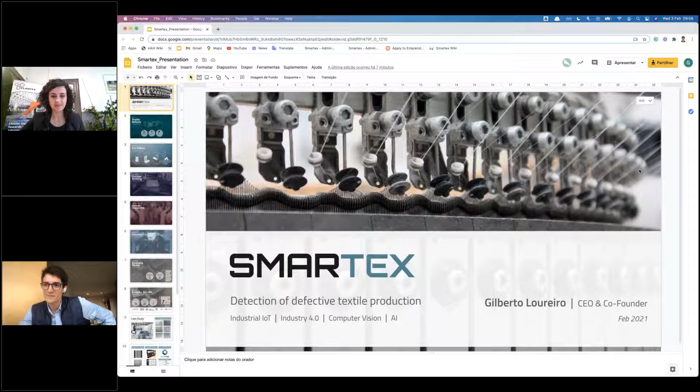Thank you for the kind introduction, Luisa. I hope you all can hear me well and see my screen properly. So again, as Luisa presented, my name is Gilberto, I'm a Portuguese entrepreneur currently living in Porto, Portugal, but I've been living in San Francisco and Shenzhen over the past years to develop this amazing technology that we propose to improve textile industry automation and also to dramatically reduce textile industry defective waste, which is a hell of a problem. I will show you details later on.

As many of you probably know, the textile industry has, at each stage of its processes, defects and waste due to inefficiencies, because we work with raw materials that are not perfectly controlled, natural fibers, and because production speeds are higher and higher. So it's normal and acceptable for every textile factory to have 1%, 3%, sometimes 5% textile waste - that's how the industry has worked for centuries. However, there has to be a better way to produce textiles without so much waste. 3% looks like a small number, but considering production volumes and the gross margins of a typical textile factory in knitting or weaving stages, 3% can represent a big slice of the company's profit. This reduces gross margins significantly, damages the environment, and because textile prices build up from yarn to fabrics, all processes have multipliers in the pricing.

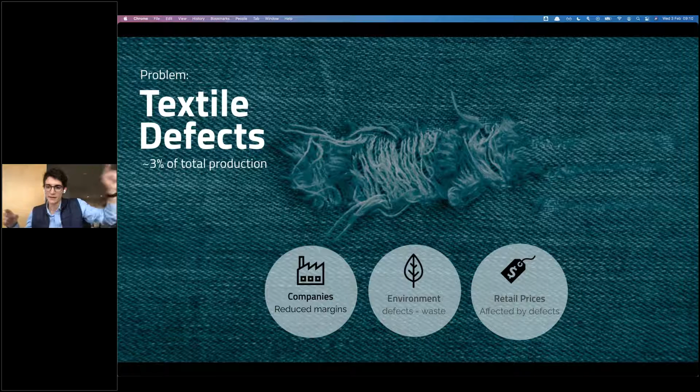This waste propagates until the end of the chain, so it affects directly the retail prices as well. The textile industry is one of the largest in verticality among industries. Sometimes the yarn is spun in India, but the knitting is done in South Europe, and then the dyeing could be done in North Europe, and then the garment is done in cheap labor countries typically. So this is the way the industry is spread all over the place.

Sometimes these folks don't talk with each other when they ship raw material from one side to the other, and the communication is based many times on trust, based many times on human inspection. They need to have several human inspections in each of these stages just to make sure that the knitting manufacturer is exporting quality goods and the dyeing house is importing quality goods. So they have two inspections that add costs, add more prices to the material, but don't add any value.

So that's one of the things that we at Smartex, and as well with Tintex right now, we are trying to collapse all of these miscommunications and digitize the way that these folks talk with each other with digital tools, right?

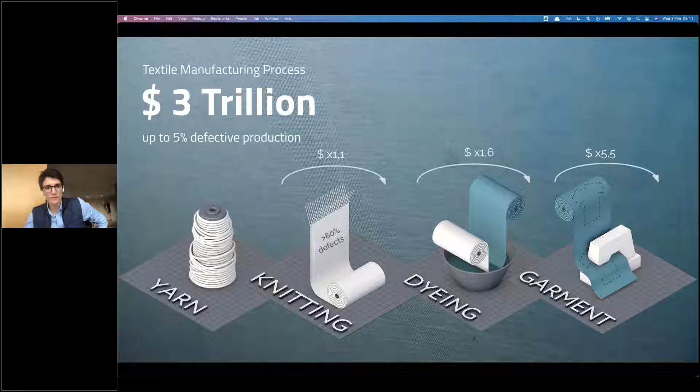So for those who don't know, this is a circular knitting machine. I usually present these types of slides for venture capitalists in Silicon Valley. When they look at this slide, they think this is a time travel machine. But this is actually the fastest way to produce fabrics that the industry knows. I've worked with these machines for more than 10 years. It's a beautiful engineering machine.

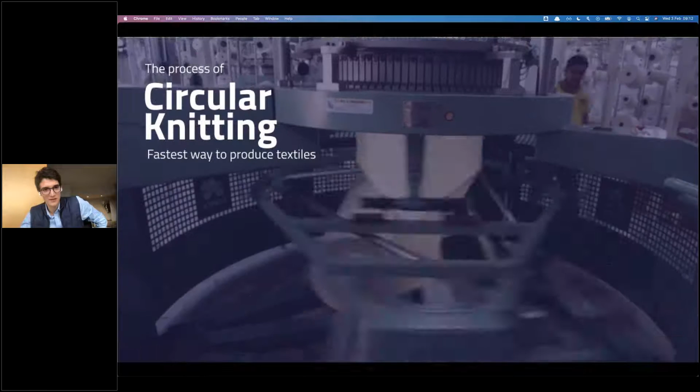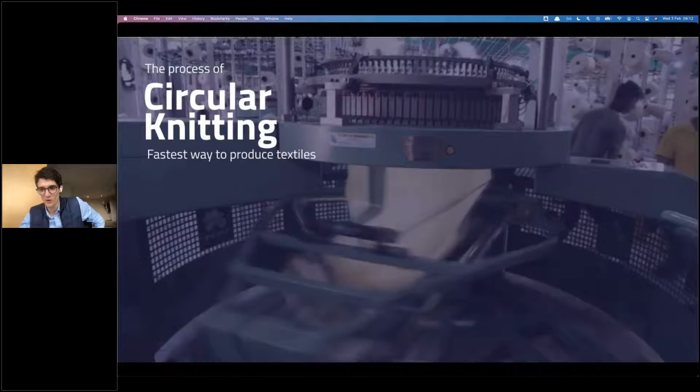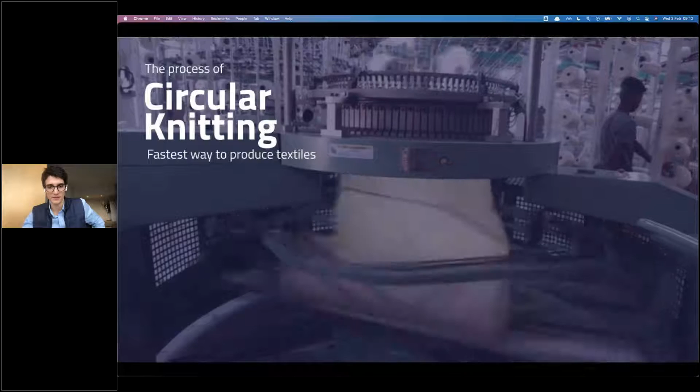As you see, there is a textile roll being produced down there. And as you can imagine, it's not easy to have a person inspecting this textile roll in real time. You cannot have a person inside that crazy machine to inspect it in real time. So we actually need the roll to be ready and then cut it out and inspect it later on. But meanwhile, the roll could already be full of defects and it will become garbage sooner or later, but you never know until you've inspected it, okay?

And if you are lucky, we will inspect it with human inspection people right after the knitting stage. But many times this inspection doesn't have 100% guarantee or 100% coverage, so they do it by sampling. And many times these defects and faults go to the dyeing stage and then go to the garment stage, and eventually we have a Nike t-shirt for $50 costs that could be avoided, and it's garbage, but could be avoided if you detected that defect in the knitting stage, where the fabrics cost like €3 per kilo.

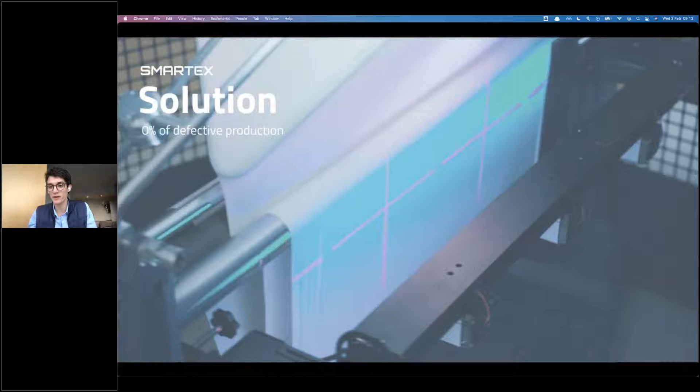So in a nutshell, this is the Smartex solution. This is what we have been working on for several years since college. It's basically, in a simple way, a bar with cameras that you can plug and play inside circular knitting machines, weaving machines, whatever machines that produce on a roll-to-roll basis. So we can take photographs of everything that is being produced in real time, store those images to the cloud.

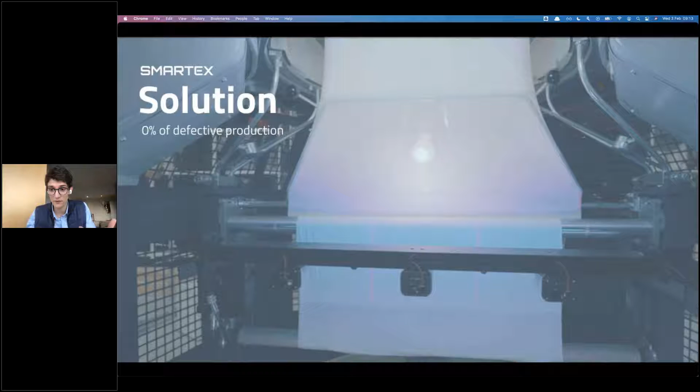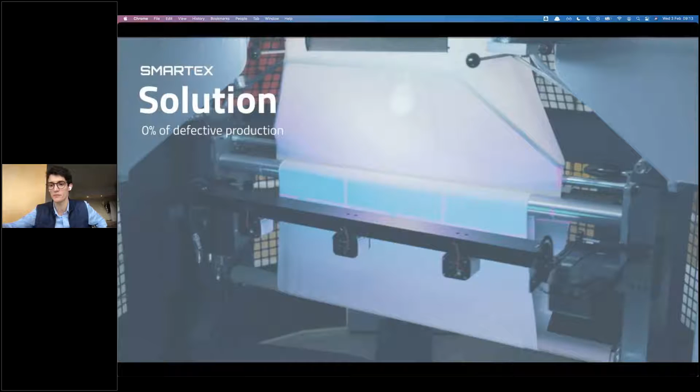We can do a lot of beautiful things with these images. We can use machine learning algorithms to inspect the fabrics in real time, so we can detect tiny defects like lycra lines or thick yarns or thin yarns here and there, tiny holes, and we can intervene in the machine immediately if the client wants. We can stop the machine, for example, or alert the employees in real time. And we also can do other services in the online platform that we provide, which I will explain later on.

In terms of the business model, this is another consequence of such technologies that depend on cloud and software services. We have, of course, an installation fee, but inevitably we also have a monthly or yearly license for all the software that runs and supports such technology. The idea here is to make sure and guarantee that the price of the yearly license needs to be 5 to 10 times lower than the current costs with current solutions of having people inspecting textiles or the waste from defective production, etc.

So just to let you know, the company exists since 2018. However, last year we were able to raise a priced seed round in the US with some of the best in the business, like Spider Capital, SOSV, and Data Collective VC, some of the largest venture capitalists in the world, as well as with the kind participation of Fashion for Good, which is a fund supported by amazing fashion brands like Adidas, PVH, and Kering, etc., that support us with lots of pilots, especially in luxury parts of the industry. We also were very fortunate to have access to the EIC SME instrument of $2.2 million US dollars in the same year.

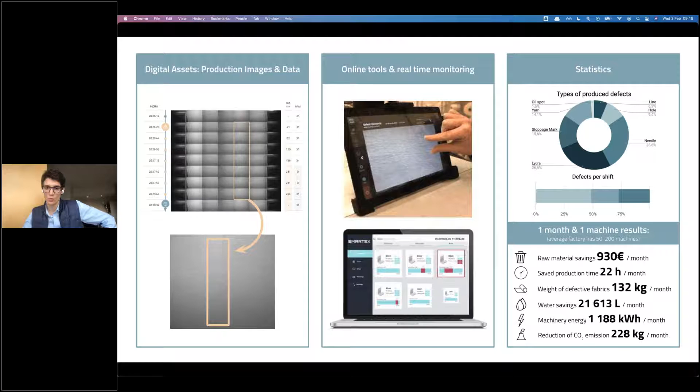So when the Smartex device stops the machine from a periodic defect, we calculate the savings in the amount of fabric we didn't waste because of that. And if we continue to calculate the savings in the dyeing house — because that fabric won't be dyed, won't use water, energy, or chemicals — we find that the Smartex device saves around €1,000 per month per machine.

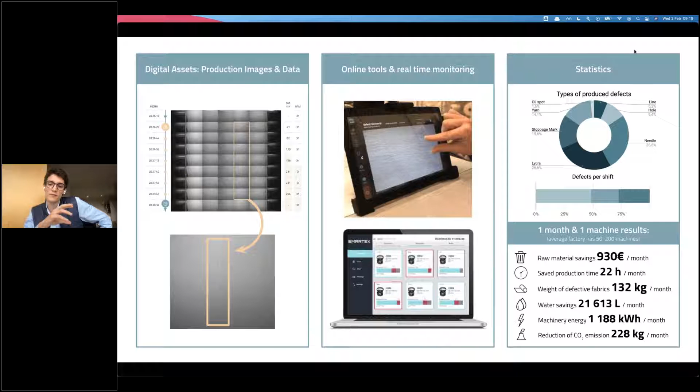This number is being confirmed over and over with our current clients in Italy, Turkey, and many other clients in the north of Portugal as well. So the impact is really amazing in terms of financial impact, but also from a sustainability point of view — the amount of water we don't need to use, the kilograms of fabric we don't need to waste, the production time we avoid spending on waste fabrics. This is very impactful.

And it's just by having the inspection not at the inspection table, but inside the knitting machines or the weaving machines in real time, because we can actually avoid things from happening. We don't need to wait for the inspection stage to check it out. All right.

So just to let you know that we also built together with Tintex an online platform, so they can have access to their machines everywhere in the world, and they can see all the crazy defects they produce, as everyone produces - okay, Tintex is not the only one that produces defects. So they can see the performance of their machines, how many meters they produce per day, per shift, per employee, per type of production, per production order, the efficiency of the machines, roll maps. They can share roll maps with their clients just by sending a link if they want. So it's like the Facebook of the textile rolls.

It's the digital version of a textile roll. I don't need anymore to send you a textile roll for you to make sure that you are buying extra quality fabrics. You just can open a link and you have the Smartex report on the other side of the world, and then you can confirm the order and you can ship it and pay for it. That's one of the traceability parts of the technology as well.

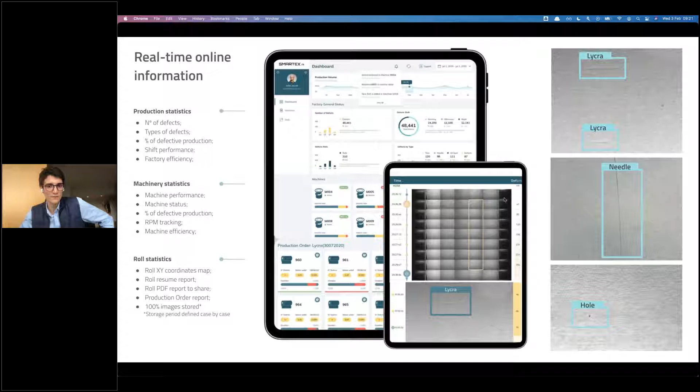Just a last slide to finish. It was really great to see that we still have this early adopter mentality, because we have been developing this technology in China, in our offices in Shenzhen, in this beautiful city. And it was very funny to receive an invitation from Tintex, from Ricardo and from Pedro Magalhães from Tintex, to check out their production, to visit their facilities and to install it there.

Just a few words about this: there are many advantages for Tintex to be the first one to try it, or one of the first to try it. It is massive customization, because many of these features and many of these ideas were asked for by them, because of their type of production and because of their way of organizing themselves. And of course, there are special commercial conditions as well.

Once the product was released by the end of last year, the prices and the conditions are different from this early adopter mentality, and therefore it is such a great pleasure to work with real industries that still support technologies that can create a real impact to improve the world. So just a final word on that, and cheers to Tintex and all the team, because they are really inspiring and help us a lot.

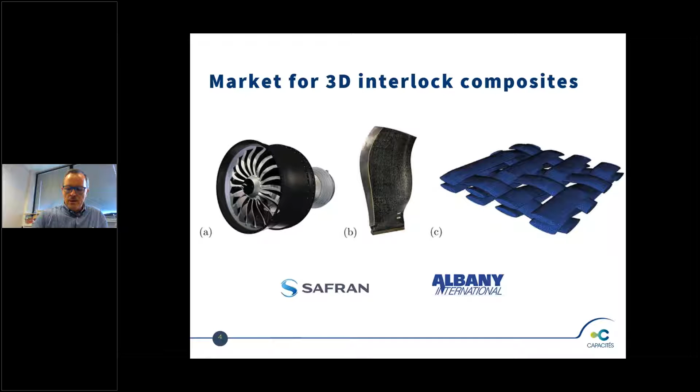Many hundreds of people are working every day to manufacture these blades, but this story began like 20 years ago. Regarding the material I have here, it's been manufactured by Albany International. I didn't work directly with them, but I will show you at the end what the material looks like, because I have a piece on my desk.

Basically, the material is 5 millimeters thick, with warp and weft directions and an interlock tow in red here, which provides the assembly of all the plies in the warp and weft directions. The advantage of this yarn is to increase the strength of the material out of the plane, in the direction perpendicular to the plate. It's a key issue in composite materials because it reduces delamination, so you are more robust and strong regarding impact, for example.

And from the application of a fan at the entry of an engine, impact is really a key issue - like birds, like rocks, and things like that which can go through engines.

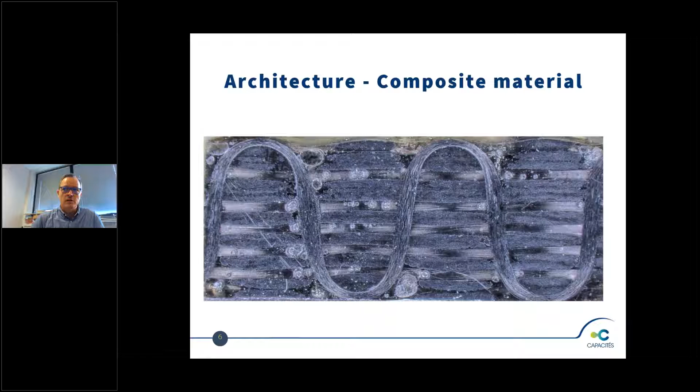So this is the architecture of my composite material. You see a kind of ugly microstructure, and I can tell you that the manufacture of the blades today is much better achieved than the one I did in '97, '98 at the University of Delaware. I was in a postdoc position, and from there I could weave with the loom and figure out what were the problems

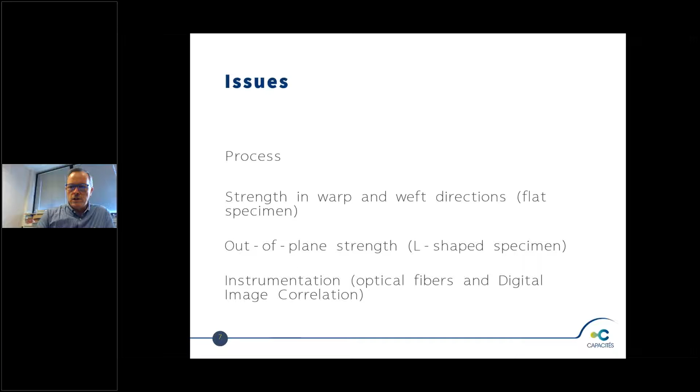coming from the manufacturing and how to cope with these defects or specificities in the material. Then the issues are the process: first the architecture of the preform, the strength in warp and weft directions, which we examined on flat specimens. We investigated the strength out of the plane on L-shaped specimens, and we tried to instrument them just to get information back from the material and increase our knowledge of it.

So first of all, the 3D interlock preform is quite difficult to shape, because all these plies are maintained together only by means of the interlock yarn. If you want to make something other than a flat surface, you have to force the plies to slide onto each other in order to avoid wrinkles. Otherwise, if you have a wrinkle on the ply, it means that at that location the ply has no more strength.

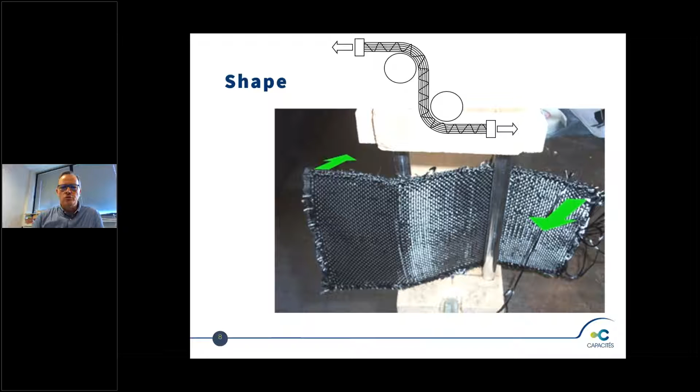And it can be a nightmare to invest so much in carbon parts and to miss the shaping of the material. This is one of the issues at stake for any industry trying to use this material for other things than flat panels.

So back to the fundamentals of the process, because you will see later on that we tried to investigate some issues in the process with optical fibers. The physics during manufacturing relies on chemical and thermal shrinkage. Basically, you have a mixing of fibers and resin. The resin goes from a liquid state, roughly a density of 1.2, to a solid state with a density of 1.3 - something like between 5 and 7% volume reduction. And this volume reduction will occur whatever you may do.

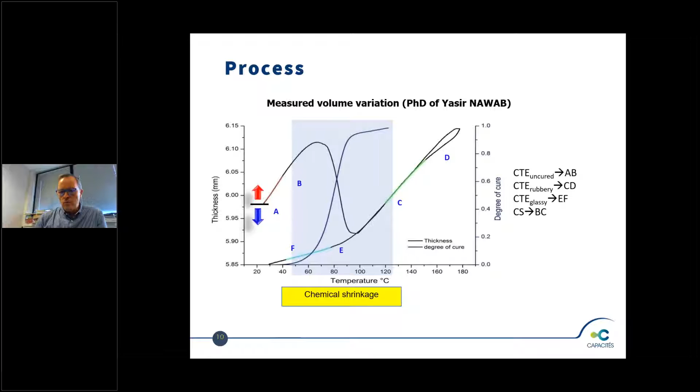So what I want to prove with this slide is that we have to really well know the behavior of the material, and not only know it well, but be able to characterize it, to put numbers on that so the industry can model the process and get the residual stress state on the specimen. For demanding applications like aerospace, all this is modeled in finite element modeling to know if the specimen, the blade for example, contains a lot of residual stresses which may affect its behavior. Then you have chemical shrinkage, and we have to live with this physics in the material.

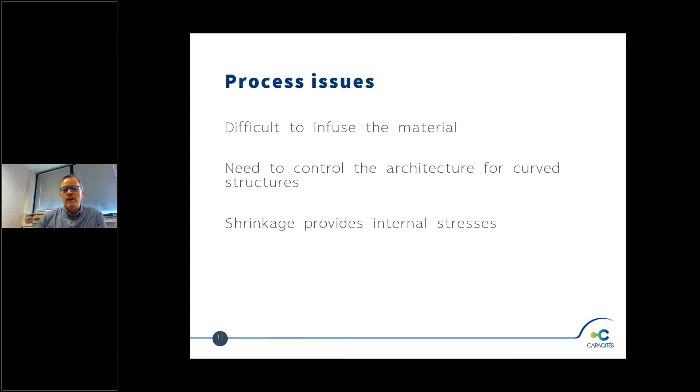So the process issues were the difficulty to infuse the material, the need to control the architecture for curved structures, like stretching and forcing the plies to slide on top of each other, and shrinkage provides internal stresses.

Next is what we did on mechanical properties characterization. In the plane, the classical laminate theory is not sufficient because the DNA of the model we applied in the next slides is based on continuum damage mechanics. On the curve on screen, strain is on the x-axis and stress on the y-axis. When you increase the stress, at first you have E0, the classical linear elastic response of the material, and by increasing the stress you provide some micro cracking in the material.

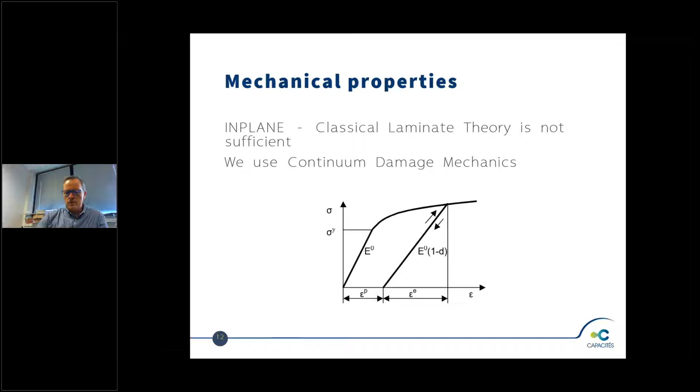And if you remove the load, you will not come back to the origin of the strains. This kind of behavior has to be taken into account to well represent the behavior and stress distribution inside the material. So we have the ability to model the material.

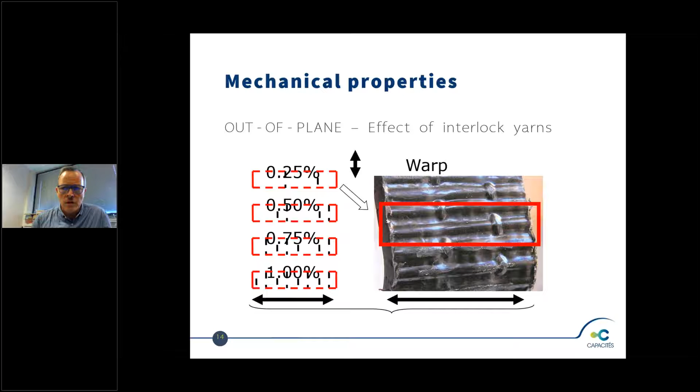And out of the plane, what we did was try to understand how many interlock yarns we should have, which percentage of interlock yarns we should have in the part to optimize the weaving. So we did a series of 4 specimens. The specimen with 1% interlock yarns has a series of yarns already woven in the material. We played a game which was to remove some interlock yarns from the part and manufacture the part after that, to provide different ratios of out-of-plane yarns, just to check the influence of the number of yarns across the thickness of the specimen.

We developed a test, and we are now quite familiar with developing tests for customers, because many customers come with a new idea, a new test to achieve, and we can cut the specimens, design the test, and practice the test.

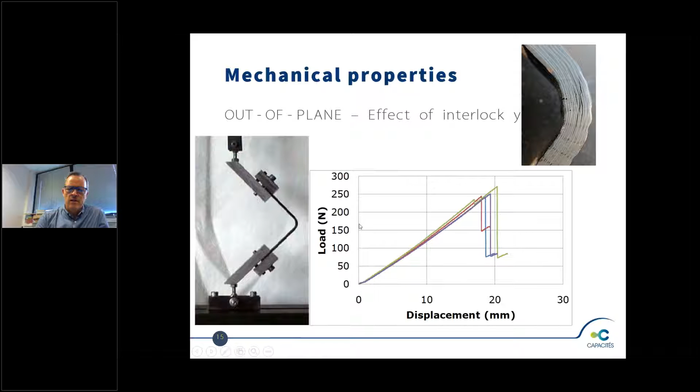This is the load displacement curve we obtained by unfolding the specimen, which has an L shape. Coming back to the interlock yarn ratio, from 0.25 up to 1%, the strength in megapascals can go from a bit below 200 up to more than 300.

We were expecting in the in-plane test a strength around 350 megapascals, and by curving the specimen, because of these interlock yarns, we keep a quite high level of stress above 300 with 1% of yarns, which is satisfactory. With no yarns, we'd be far below 200 megapascals, meaning we reduce the strength of the specimen by something like 30 to 50%, just because it's a laminate, and the failure criterion is not the same anymore, since you get delamination between the plies.

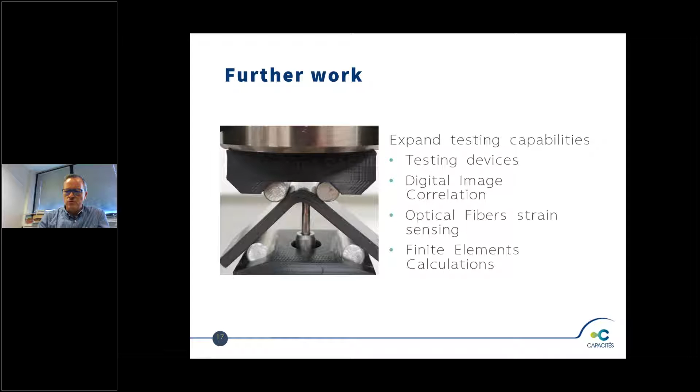In further work we will expand our testing capabilities. We've already expanded them with testing devices like the one on screen, using digital image correlation to get strain fields instead of strains measured by strain gauges. We also use optical fiber strain sensing extensively when necessary, and we combine everything with finite element calculations in the nonlinear range to have a discussion between experiments and modeling.

Now I'm turning to optical fiber strain sensing. This strain sensing comes from, as you see here, a pencil next to the optical fiber, which is a tiny glassy stick. The sensitive part is about 10 microns inside the glass coating of the optical fiber, which is 125 microns. In addition, there's a plastic coating, making the final diameter 250 microns.

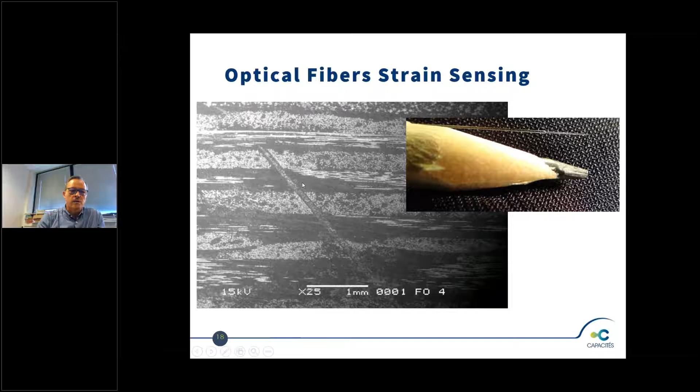On this graph you see a line at 45 degrees from the horizontal, representing the optical fiber embedded in the material. This optical fiber was a big promise to be able to go inside the material and check properties. But we ran many tests just to figure out if what we were measuring was true or not, embedding optical fibers across the thickness, perpendicularly or at 45 degrees.

The surprise was measuring, between the liquid state and the solid state, deformations and strains up to minus 3,000 microstrains, meaning 0.3% thickness reduction measured by the optical fibers. This was a big surprise at the time. Now we're not surprised anymore because we've mastered it.

We're familiar with this shrinkage phenomenon now, but optical fibers can be good information to check inside the material. The cost to pay is very expensive in terms of time and broken fibers, so it's only an academic action, and I wouldn't sell it from scratch for any applications in the industry. But if necessary, we can do this kind of thing.

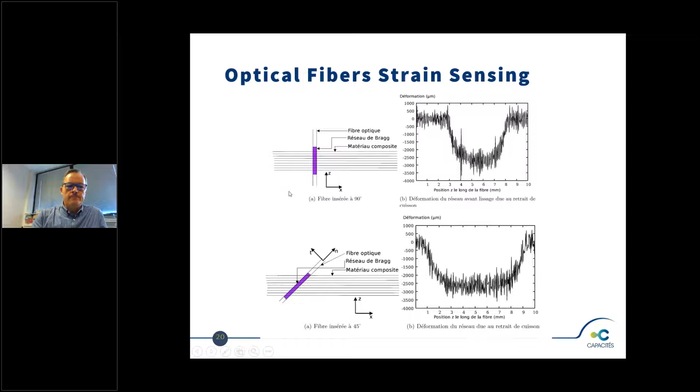It's like trying to put the optical fiber in a non-homogeneous strain field, similar to what you'd find in interlock yarns or interlock preforms. Because when you have a periodic tow and resin architecture, and you put this fiber Bragg grating inside, you get something like an average of the response, which is not really what you want to measure.

On the right we have a specific reflectometer measurement, a very heavy experiment with big interferometers that cannot be used in industry. From this specific instrumentation, we could prove something important.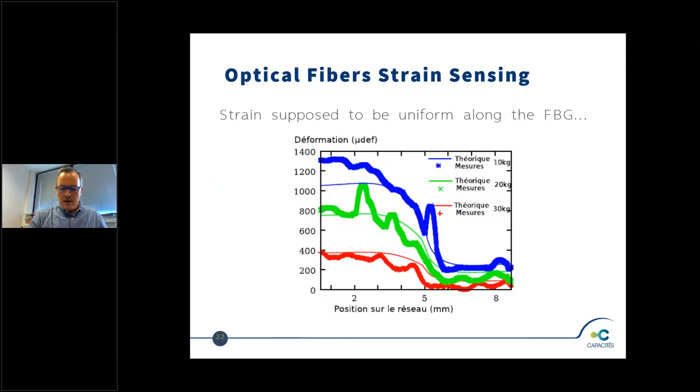So from these academic studies, the key is to understand the mechanical behavior of composite materials, or the manufacturing process, like handling.

So still the preform is something which cannot really be automated, because as the first speaker said, you have many defects, and these defects can directly have an action on the strength of the material. We have to cope with physics like shrinkage. Instrumentation is possible but with limitation, as I said on optical fibers. But in any case, these academic studies were like oxygen to provide expertise towards the industry at CAPACITÉS.

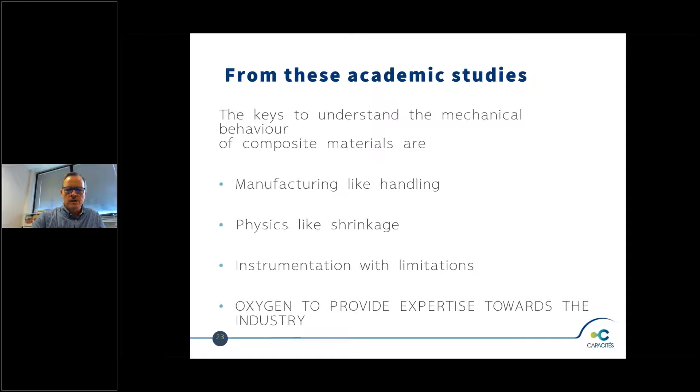Then I go to the applications and success stories. First, we were challenged by the New Zealand syndicate for the America's Cup between 2010 and 2012, because I was involved in developing the platform by putting optical fibers almost everywhere on the boat to monitor the hull, the rigging, the mast, and the appendages like the hydrofoils. They were really happy to gain knowledge and to be able, by themselves, to instrument their boats afterward.

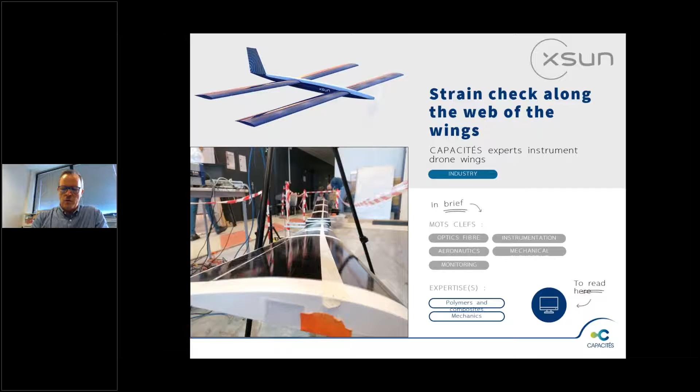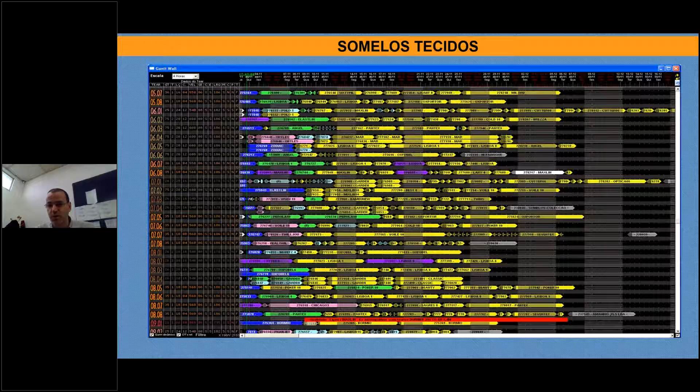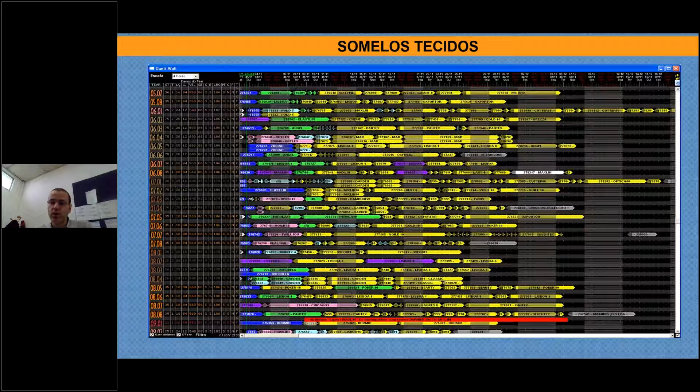We already have a Gantt chart where we can calculate our deadline to the customer, to see if we can achieve what the customer wants, and if not, what is the best deadline we can make. We already have some efficiency issues that we are optimizing within this Gantt chart, within a human relation with the rules. We try to have the best setup when we make the order within a machine. This Gantt chart gives us an idea if our production is up to date or already delayed, so the operator, the user, can make small changes in our production so it can achieve the deadlines the client wants, or if a client has some urgent demand, we'll try to embed it within our production orders.

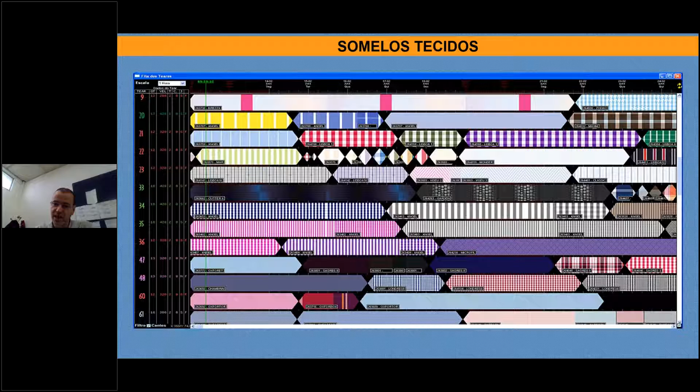Within our company, we have some contamination issues. Sometimes we have dark fabrics and light fabrics, or some colors that influence the other colors within the weaving shop floor. So usually we have a concern trying to avoid that these different types of products are mixed within the same machines or near machines, so we don't have quality issues at the end of production.

Within our shop floor, we have an infrastructure with IoT sensors that give us information if our machine is stopped or working, and some automatic causes of stops within the machine are already gathered within our system. If the machine stops for another reason, the operator is able to interact with our electronic device and say to the system why it is stopped - if he's doing setup, cleaning the machine, or if the machine has a malfunction - it's already gathered within our IT system.

So we now already have a connection or relation between our planning and our production. This way, if something happens that will delay our production, the planner has a chance to improve our efficiency and react as early as possible.

We are developing a new system with HATA, a company of our group, so we can have the information gathered within the system, and this interaction made by other kinds of electronic devices that are not only the ones within the machine, which are very limited in interaction. This way we can have a person with a group of looms who can see what's the problem with the looms and avoid walking around to check if the looms are working. This way he has the information within his range, even if he's far away from the machine that has a problem.

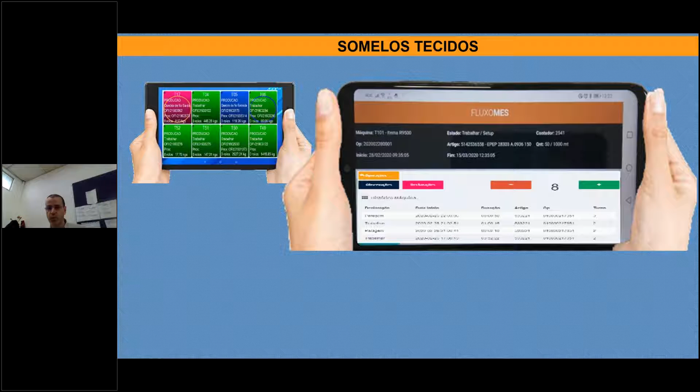He can see the efficiency of the machine, so he can react, be more attentive, and understand why it isn't working as it should. He can also define the orders we are producing and the next one, so we can see when it is going to end from the point of view of production. This information we already have, and we are developing this product so we can have it in all the machines in the company. Now we only have it in looms; we are upgrading it to the rest of the company.

From this information, we can have the overall equipment efficiency. We have a view from the machine, the group of machines, the product. We can have several statistics to improve our efficiency, to analyze the main cause or reason of our inefficiency, what we are losing with this inefficiency, and how we can regain this efficiency within the company.

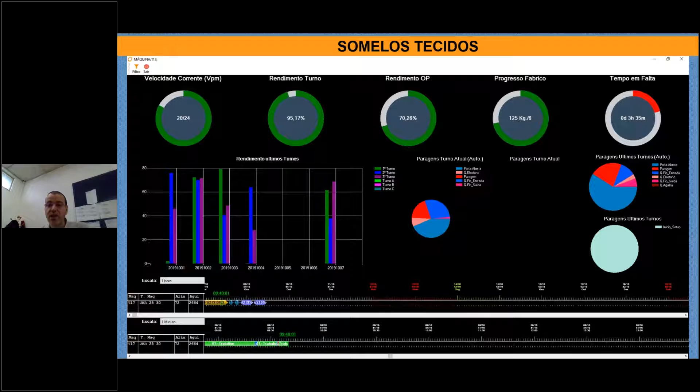We are also making an R&D project with HATA, CITEVE, Minho University and CCG to try to improve our planning using artificial intelligence and operations research, mixing the two within a module that can suggest new changes within our production, some scenarios, so we can improve efficiency.

As I said earlier, humans have some tools to improve efficiency, but when everything starts to happen at once - when a client demands an urgency, when a machine has a breakdown, and the efficiency isn't what is expected - sometimes the decision made at that moment isn't optimum. So within this project we'll try to analyze the production, the load within the production being made, and suggest new scenarios, new hypotheses, so we can change and improve our efficiency within the company.

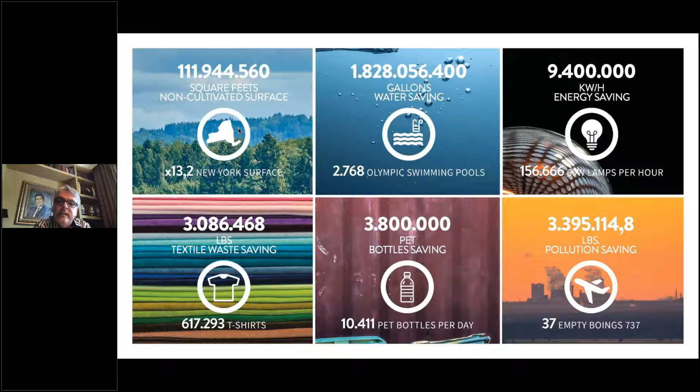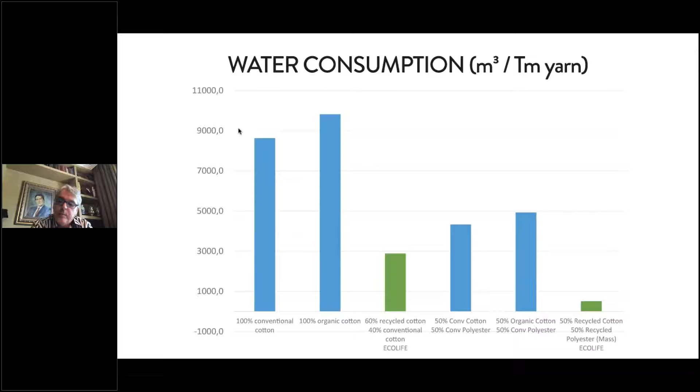To finalize on sustainability and circular economy, I really consider that in order to consider a company involved on sustainability, there are 4 important premises. One of them is to really show and measure the environmental impact of the company, the footprint on the planet.

Also to research and develop new sustainable materials, always focusing on what is going next. Transparency means that a third party should certify the traceability of the fibers and the whole supply chain. The GRS certification is something to take into consideration.

And at the end, I think communication is also crucial. We should be able to communicate to the final customer all this traceability and these parameters. Marketing is crucial also on this.

This is my company, Belda Llorens. It's more than 65 years working with these recycled fibers and investing in new ones. We have really big know-how on spinning. Belda Llorens and the brand Ecolife are a referent today in the world of sustainability and circular economy.

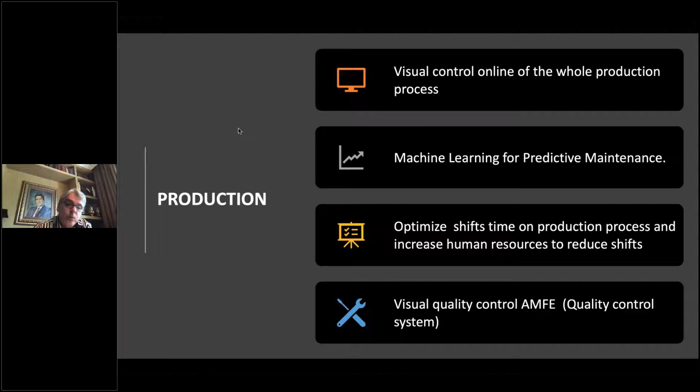From the logistics part, we will be able to have just-in-time in the whole internal process and external supply chains, which will be fantastic. We will also be able to interact with the transport company to optimize the loading and unloading of goods. Collecting big data statistics per color, per size, per content, per season, per tendency will bring us to a perfect management of our stocks.

From the commercial and sales part, in our industry, especially in spinning, we still show our color cards and samples in physical form. Getting digitalization on this will save a lot of material that we spend on this. Digitalization will not only avoid this material, but also allow our customers to have a final product simulation by mixing colors. Anything could be done here.

Currently we still take time to answer orders, even if we offer a stock service. But the possibility of selling online and informing customers of changes in real time will be very, very helpful for our customers.

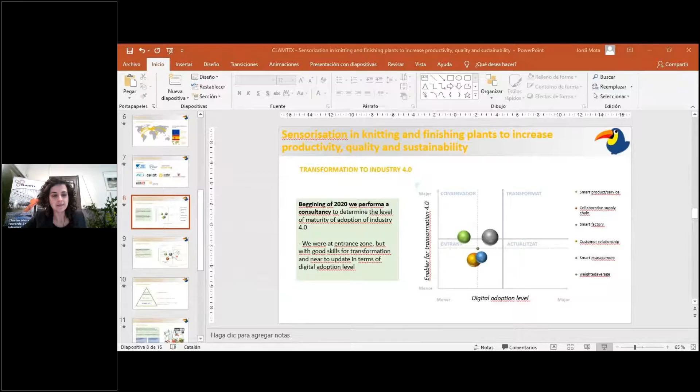Okay, thank you, Luisa. Can you hear me? Yes, I can see your screen, but maybe if you can pass your presentation full screen, that would be better. Can you see my screen now? Not yet, personally. I can see your screen, but not full screen. Okay, let me try to share another time. Maybe now? Yeah, that's it. Okay, thank you.

Good morning, everyone. My name is Jordi Mota. I am the R&D manager at E.Cima. In this presentation, we will see first of all a little presentation of our company, and then the first steps that we have done in terms of sensorization in our knitting and finishing plants to increase productivity, quality, and sustainability, and what we have done as first steps toward our idea to transform into Industry 4.0.

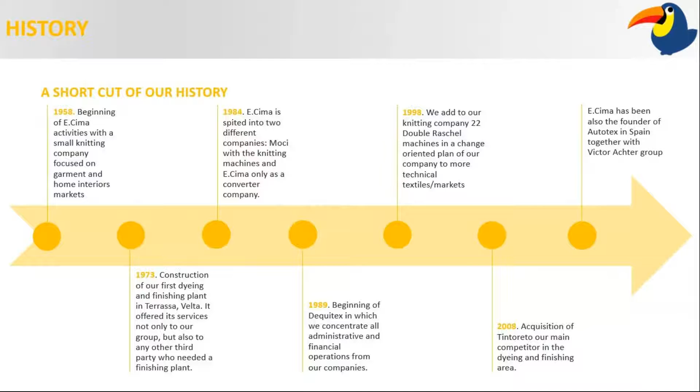In this first slide we can see a little summary of our history. At the beginning, E.Cima was a small knitting company focused on the garment and home interior markets. The most important movement of the company was in 1998 when we installed 22 double Raschel machines in our knitting company, which marked a change in the main business of the company. This is the main business we have now, because we started to produce 3D spacers, which is now the biggest product we supply to the different markets.

We have two main facilities: the sales office and also the dyeing and finishing plant located in Sabadell, and the knitting plant located in Terrassa. Terrassa and Sabadell are very well-known cities with a large tradition in the textile industry. There are fewer companies now, but some years ago they were among the biggest cities in Catalonia and in Spain working in the textile industry. Now we have more or less 110 people working in both facilities, we produce 5 million meters, and we are very near to Barcelona, less than 20 kilometers.

We are not a fully vertical company because we don't produce yarn, but we buy the yarn and we have the possibility to work the yarn with two split warpers, mainly for the monofilament of the 3D spacers we produce, and also one direct warper for the other beams we have to do.

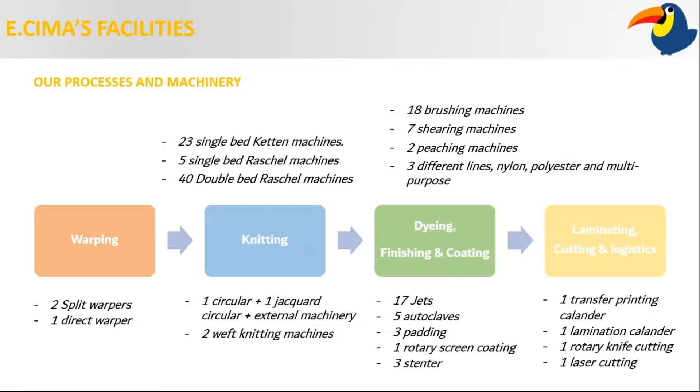The markets we work in include, perhaps most importantly, orthopedics. In some cases we work directly with the final customer in the orthopedic market, and in other cases we work with an intermediate that we supply only the fabric which they then transform. Other markets include automotive, industrial fabrics, shoes, upholstery such as office chairs, lingerie, mattresses, and technical garments. Under technical garments, we can include parts of jackets for defense or personal protective equipment, which we classify in the same sector as technical garments.

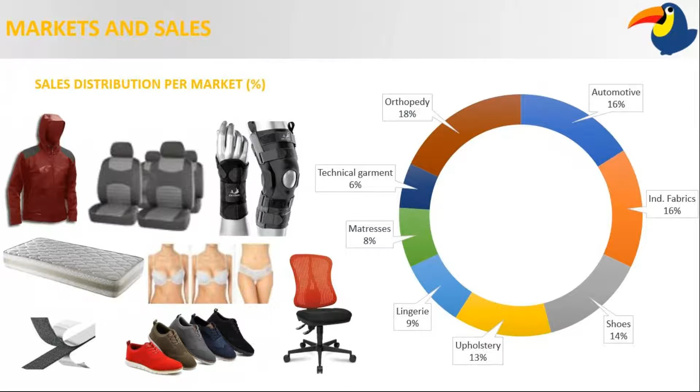Okay, we export more than 70% of our production. 57% is from the European Union and 15% is rest of the world. And at national level, we work about 28%.

Now we are working with more than 38 countries around the world, and this is one of the reasons, because in past financial crisis we kept a little bit not in the best numbers in terms of economics, but we are still here working.

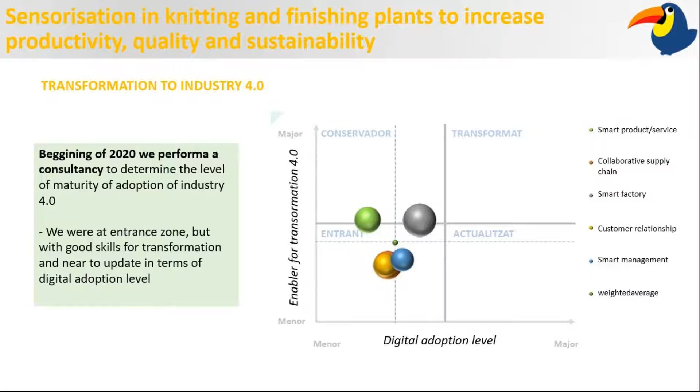But after going on, we decided to focus on the main or most important areas and do the roadmap for this industry.

This was important because, talking with the consultancy, it's important to define a roadmap because it's very difficult to understand - not to understand what we want, because more or less the company knows what we want, but it's difficult to plan what we have to do to move from the entrant zone to the transformed zone.

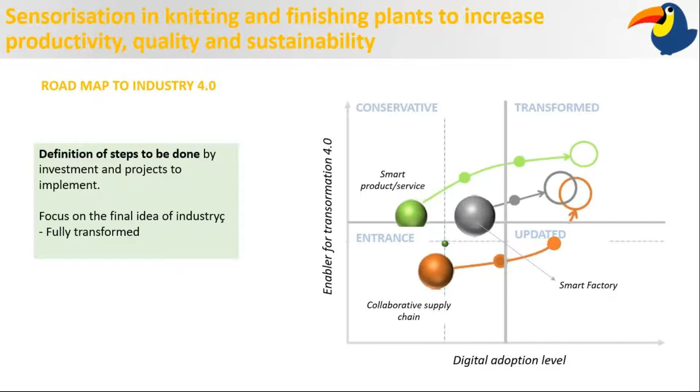So the little circles that you can see are only to show that we have to do little steps to get the transformation, and it's not the best way to try to go in a faster way. So we have to do little steps to go to the transformed zone.

So our company already had an ERP available from several years ago, and it's a good ERP, and we have implemented very interesting modules. And then we had some PLCs in the most new machines, but not in the older machines.

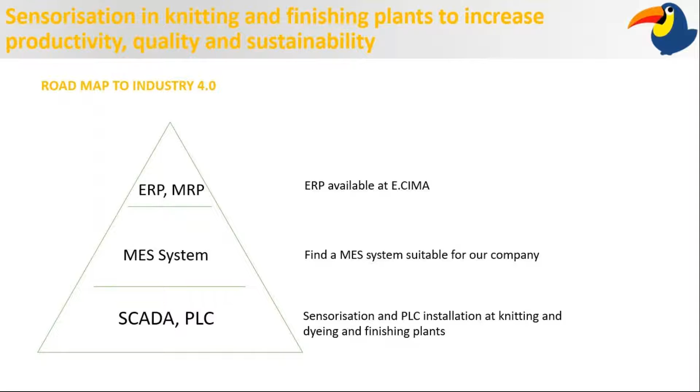So the first step that we performed was to install PLCs on the knitting and the dyeing and finishing plants. Yes, and then, for example, in the introduction of the PLC at the knitting plant, it was the installation of PLC just to see how the machine is, if the machine is working or not, and if it's stopped, why it's stopped.

And then we also tried to introduce some sensorization on the dyeing and finishing plant, that we will see on the next slides. This sensorization we started on one of our stenters, just to see in line, for example, the weight control, and then with the PLC and the automatization that we can perform, we adjust the overfeed, the speed, and the squeeze of the machine.

Also a temperature sensor inside the different chambers or cabins of the stenter to see the real temperature of the fabric and to do a better drying and thermosetting, not just for the thermosetting of textiles, but also for the polymerization of some products from the finishing or from the padding. So this also permits adjusting the speed of the fabric to get the real time that you need.

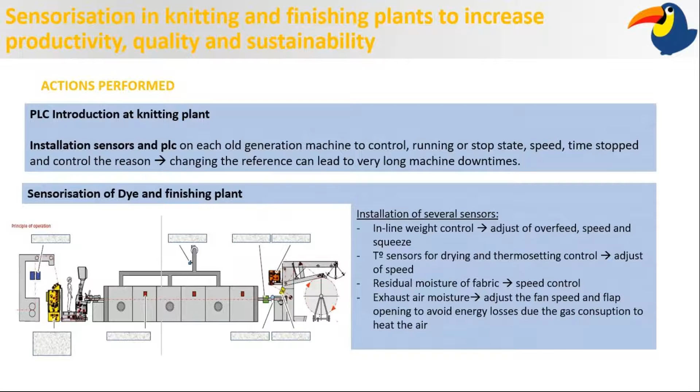Also, we introduce a residual moisture sensor at the end of the stenter, because for some processes or post-processes, you need a specific humidity and relative humidity. So we can adjust the speed to get this humidity, and also monitor the exhaust moisture, because normally you have the fan speed and the flap open, and then you put inside the stenter more hot air to dry the fabric. With this sensor, we know if the air we are exhausting has moisture or not, and this is the best option we have to get a more sustainable and energy efficient system in the stenter.

So the actions that we perform have some benefits. Now we have all the key data at a glance. You can see all the key data inline and also online, because we can collect this data and see it from other systems. This reduces the decision time, so now we are more flexible and faster than some years ago. It permits full control of the batches and also full control of the key process parameters.

Maybe I highlighted three of the most important from my point of view: it provides an improvement of customer confidence because of the quality control, an improvement of productivity and sustainability, and also the improvement of company worker satisfaction. Our workers are more satisfied than some time ago, because they can see that their work has more sense and where to focus to do a better job.

Yes, this is what we perform, but for future implementation we are on the way. We want to improve the machine learning to avoid the defects. Also use machine learning to make planning proposals and adjustments because of undesired stops, and implement machine learning for planning machinery maintenance. This last one is really easy, something we will do in the next months.

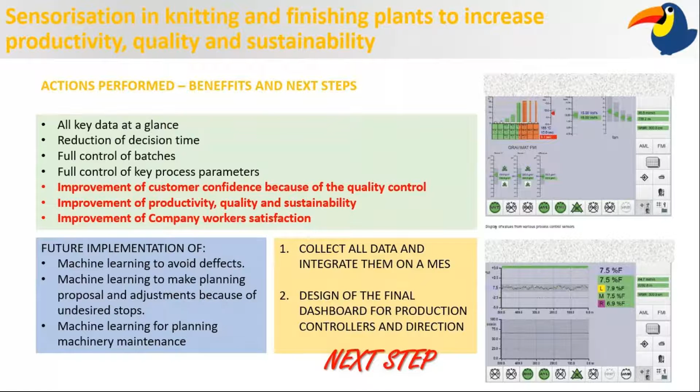And finally, I want to do just a last slide to talk about the future challenge from our point of view. I'm not talking about the industry, it's just for our company. Yes, we are trying to improve the defect detection at the knitting plant.

We do some approaches with different softwares and technologies. Now, the defect systems explored don't sufficiently solve our problem because of the investment needed, taking into account the return. This is, I think, a particular circumstance here in our company. Maybe with the solution that Gilberto shown before, maybe we can go on.

Also, another important future challenge will be the automatic warped beams warehouse. This is something that's solved, but we have to see how to implement it in our plant. This is for the storage and transport to the machines.

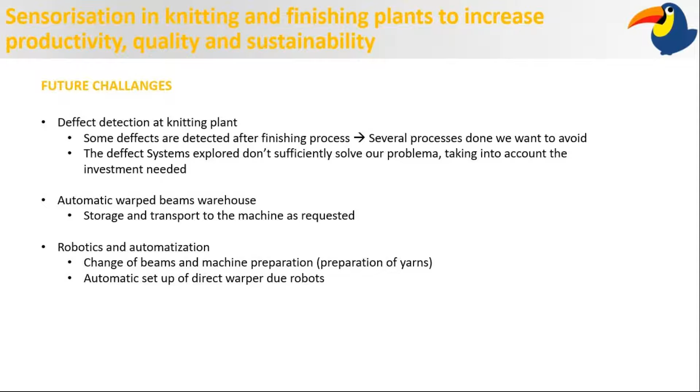And finally, we want to see, maybe next week on the panels, how robotics can help us. Of course, one of the most important problems in our industry is the change of the beams and how to prepare the machine, the yarns, and so on. It could be very interesting if someone develops a solution. Also, the use of automatic setup of the direct warpers due to robots -- this is something that's possible, but we are now just seeing if it can help us or not.

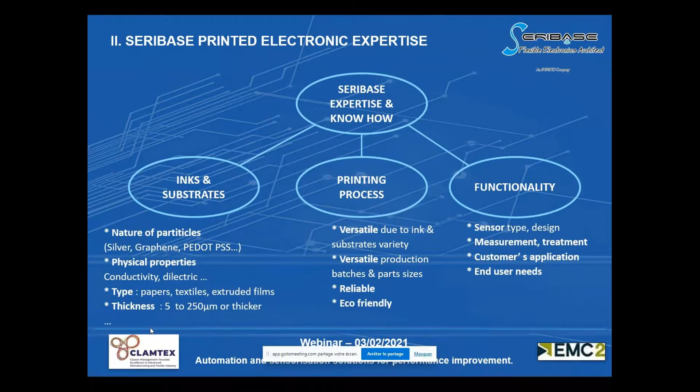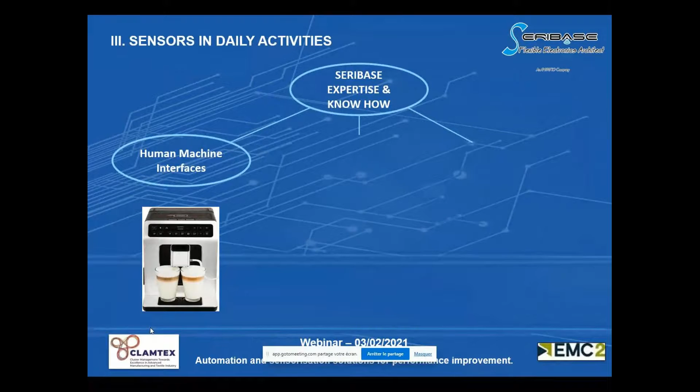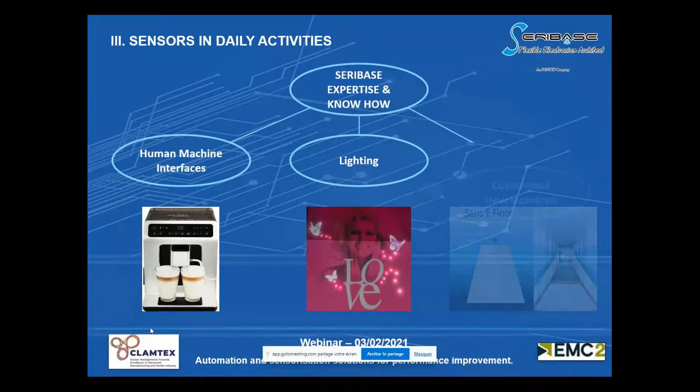So all those three fields are our fields of expertise, and we propose them in daily activities in three different main activities: the human-machine interface, very industrial; the lighting, more in the aesthetical and perfumery field or luxury field; and the last one is the customized development, which is not only a product or sub-assembly of products, but a whole product.

Then we will see what kind of sensors we place and we make. First, in the human-machine interfaces, the very first sensors are just the detectors, the basic on-off key, but we now have new aims facing translucency, activation force, or no force at all. So the customer has new needs, but the classical key is still a sensor or detector.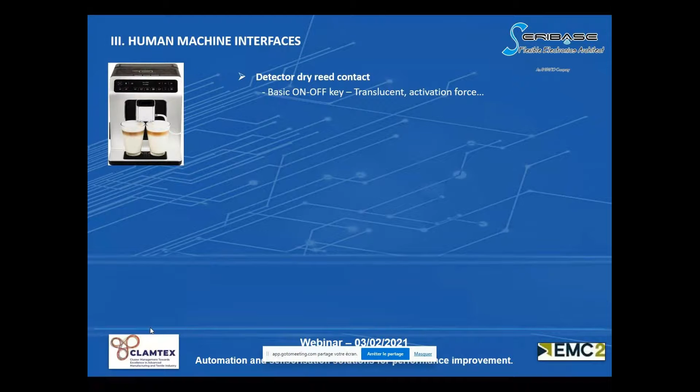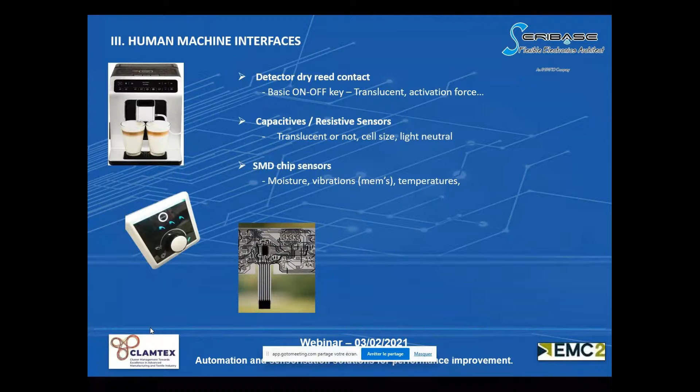We also have capacitive resistive sensors like a smartphone, so when you touch it with a finger you can detect something. But if you approach without touching, if you are contactless, you are also able to get a measurement. We can also place classical SMD chip sensors on the printed circuit, and more recently piezoelectric sensors printed with new inks are arriving for vibration or heat detection. So all those sensors are actually used in the industry.

In the lighting, we have a different nature of light: the LED, of course, or the electroluminescent, which is a printed ink that brights or gives light. We need sensors to control the energy. Some customers want a flashing mode, a dimming mode. Some others want to switch on the light in relation with the sunlight—if the night starts, then we enlight the product.

In the last few years, we were also working on energy harvesting, using radio frequency signal energy to get sufficient energy to enlight or switch on the LEDs. In the picture, in the bottom right corner, you have a car. The LEDs printed and implemented on paper circuits get the energy from the mobile phone you can see in the bottom right-hand corner. The mobile phone is placed in NFC mode, and the energy comes through the NFC mode, through the printed antenna, which is a sensor, and is given to the LEDs of the car.

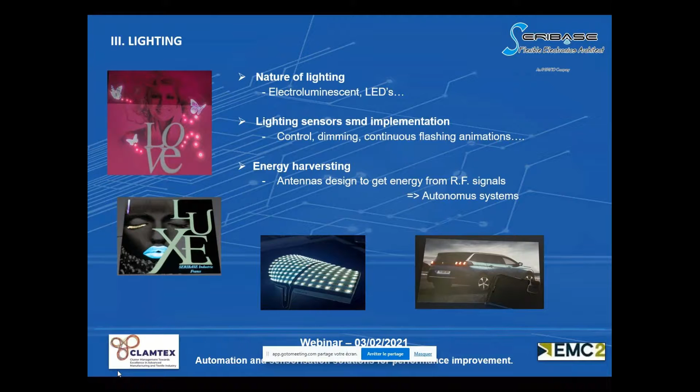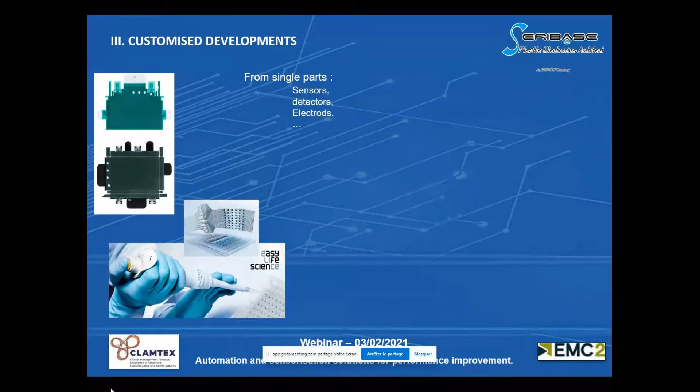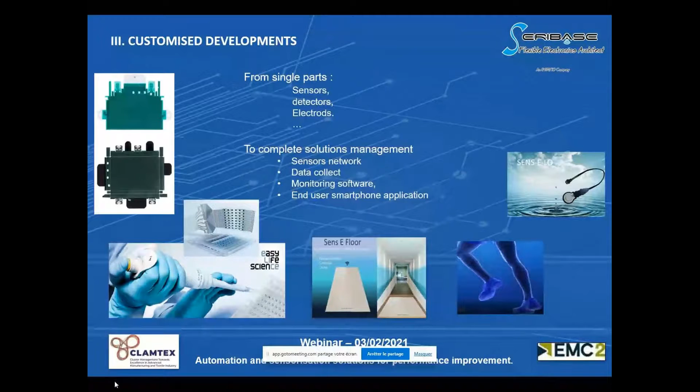So sensors are basically everywhere. And in the last part, for the customized development, we go with our customers from just a single sensor part—just the sheet with sensors, electrodes—up to the full solution, which is a complete product with information to let the customer decide how we can make the improvement.

So just in detail, the sensors, detectors, or electrodes shown here let you understand that printing a track with appropriate ink can have different functionality for the end user. On the left-hand side, we have an intrusion mesh detector—this is a flat foil with one track covering the whole area, and when the intruder tries to go through that kind of skin, it will crack the track, and then we detect the intrusion.

With the same process, using other inks, we can also do sole warming circuits, and that's interesting because sole is in the textile and wearable market—sole pressure cells, you can see the black dots, which are the tops of the pressure cells. Here we're also again in the textile and wearable field, and some other products can have interesting opportunities, like the electrodes.

In this picture, we can see the electrode used for the COVID-19 PCR analysis—an open market as we work on biocompatibility aspects, which is interesting also in the wearable and textile field to have sensors in touch or in contact with the skin.

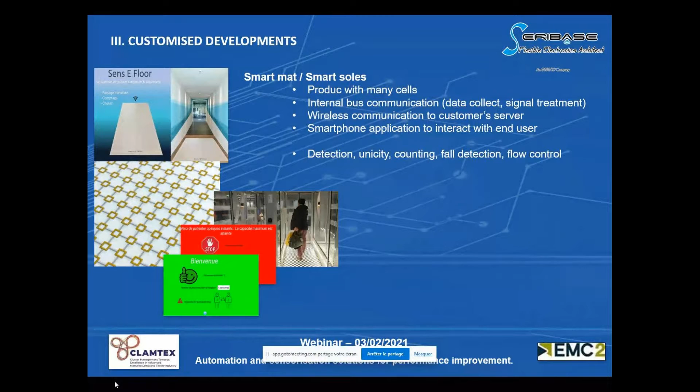On sensors, for products requiring performance improvement, customers may need a product with lots of sensors. Here we have a picture of the Smart Mat and here, Smart Soles. Those products need not one sensor but a lot of sensors that will react or act like pixels.

For us, printing one, ten, or a hundred cells or sensors on a sheet is not really a problem anymore. The problem is not the sensor—it's more about the information: how to get it, how to forward the real value to the customer, and how to let the system interact with the end user.

So this is the reason, on the left-hand side, you can see a lot of cells, just a person walking on the mat, and with the dashboard or just a software you can interact with the end user. In that case, you just have two solutions: you inform him that he can go or not. On the right-hand side, you have the soles.

So the difference is that you are in embedded electronics, and there is mobility with this system. You have a lot of cells printed at the same time. It's not a problem, but having all the cells give real-time information at almost the same time is more difficult. You need to have electronics placed very close to the sensor, and after that you go wireless to forward the data to the user.

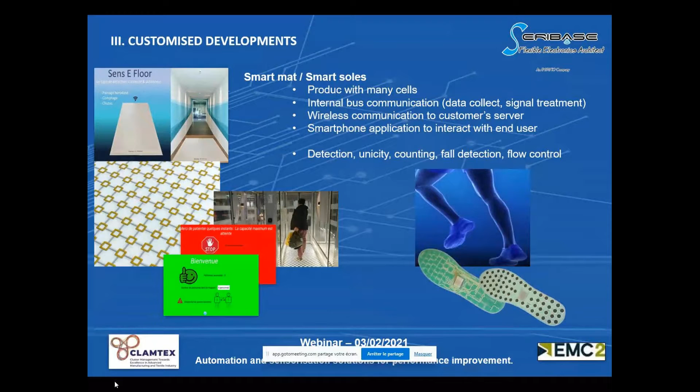And you understand also that those systems need dashboards or a system with graphical charts.

Another product with printed sensors is the Sens E Lo item. It is a sensor that detects water or humidity. All those sensors may be transferred to textile, as we print also on textile and we work with textile, but here it is placed on the roof, underneath the roof shield, and the object is to detect if the roof is waterproof or if there's a leak.

So there's not only one sensor, there are many sensors all over the roof, and the sensor needs to detect the presence of water or not, but it also needs to communicate the information. Because we have plenty of sensors on the roof, you need a system that collects the data. So there's a box, and the box needs to have a configuration mode and transfer data in real time, maybe to a server, cloud, or computer—something that will collect data and let the software, with the appropriate application, give the right information to the customer or end user.

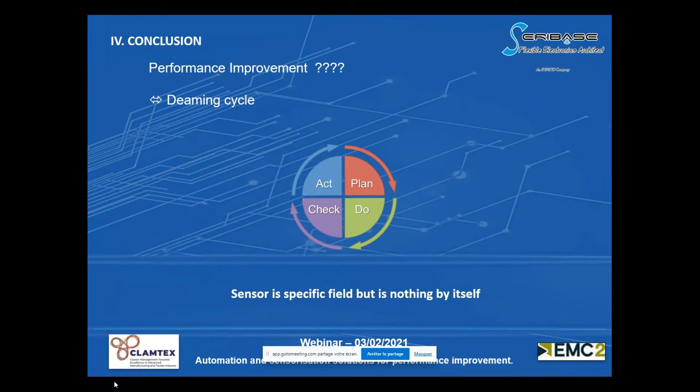When I was asked for this presentation, my conclusion was that performance improvement, in my mind, is like the Deming cycle—it means you need to plan, do, check, and act. I guess everyone here knows that. And if we transfer that to the sensor and the system printed on textile or soft films, it needs to have a system configuration.

So software, when you place the alert levels, you decide what you want. But of course, sensors printed or implemented on the appropriate substrate—as I said, PET, textile, paper, or other substrates—then the sensor is working, it gets the data, so there's electronics to collect data and transfer them to the server, and human action or just automation to react.

From this conclusion, what I wanted to explain is that having the sensor, having the right sensor, is okay, but the sensor by itself is not sufficient anymore. You need the whole system, from the sensor up to the chart and the interface on your tablet, smartphone, or computer. And in this, I guess we can help in many ways.

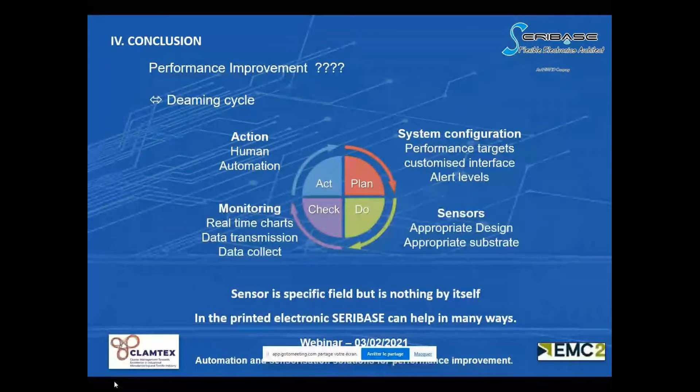I made it maybe a bit quick, but you've seen a few sensors in different cases of application in the IoT. As I said, the substrate can be very different in relation to the customer's needs. Thank you very much indeed for your time, and I'm here to answer questions.